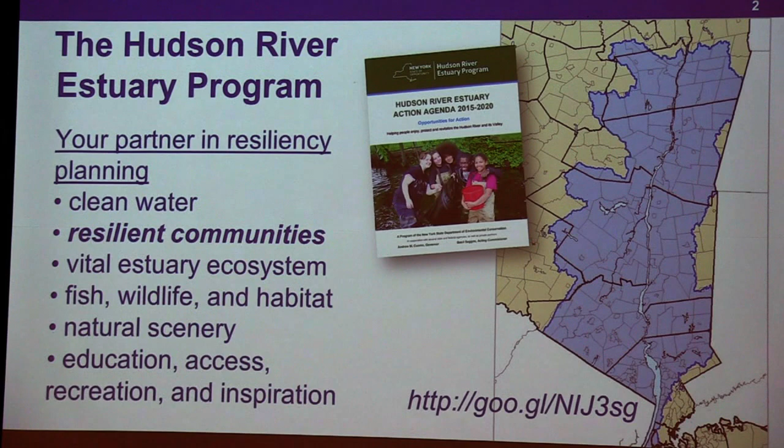I'm just going to briefly introduce our program, the Hudson River Estuary Program. We're part of the Department of Environmental Conservation, but we're a non-regulatory part. We work with decision makers to make decisions that are good for the Hudson River Valley, the ecosystem, and its people, because this is a really unique area. We're less than 15% of the state's landmass, but 85% of its habitat and species diversity occurs here. It's a really rich, complex region, and we want to make sure it stays that way. So we're here to help you with education, technical assistance, grants, things like that. We hope this is maybe only the beginning of our relationship working together.

We work across all these different benefits. This program is through our Resilient Communities team.

Whether you were living here or not, the hurricanes in 2011 and 2012, Irene, Lee, and Sandy, were really the focusing moments for us to get involved in this work of what's the future of our waterfronts. Thinking about longer-term risks of sea level rise, and then these big risks of hurricanes that are hard to predict. But we knew we wanted to do something about it, so we started working with communities on planning for that future and trying to be proactive. Because if you're not proactive and don't create a vision now, you kind of get stuck with what you get stuck with.

The main climate risks in New York State, we do our own modeling, the state funds modeling to understand how our risks are going to change in the future, because we take this really seriously and want to help communities plan. The three main risks are increasing temperatures, changing precipitation patterns, and rising sea level. Those lead to what we call climate risk, the impacts to humans, which are flooding, heat, and drought. Climate adaptive design tries to consider all of these risks, but flooding is definitely the primary one when you're looking at waterfronts.

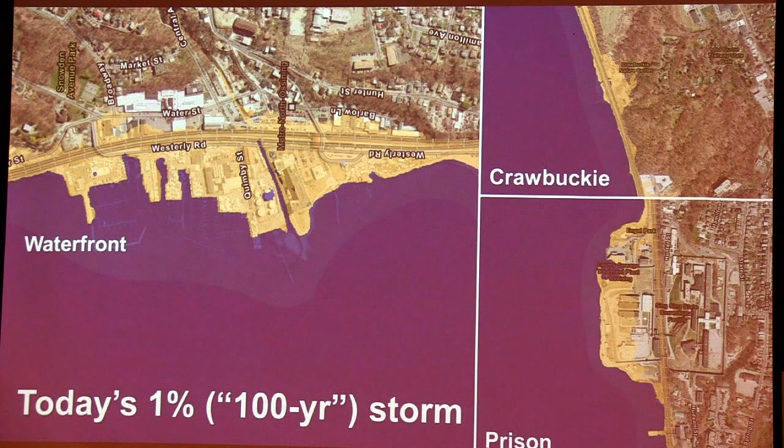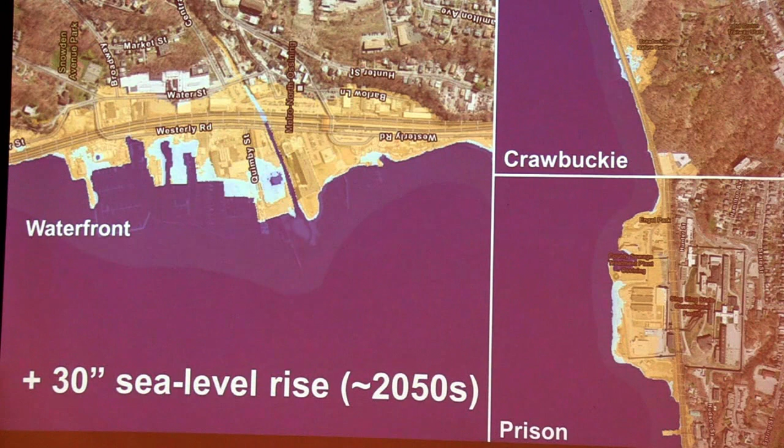If you add in 30 inches of sea level rise, so 30 more inches of water onto the Hudson, that's when you start to see more significant changes. Right now, that's a high scenario for mid-century, the 2050s. So this blue, again, is projected to be inundated all the time, or at least at high tide. This is really the river kind of taking back some of the land.

The good part is that climate adaptation, adapting to climate risks, is to a large extent in your power. Mitigating climate change, trying to reduce emissions and reduce global climate change, is absolutely vital. However, we all share the same atmosphere, so you can feel a little bit helpless when you work just in mitigation. So it's good to couple that with working on adaptation, adapting to the changing risks. And that can be done on a landowner scale - you can adapt your home. It can be done on a business scale - you can adapt your business. Or it can be done on a community scale.

Thinking about where are our buildings, where are our parks, where are our roads, and how are those going to change over time. So that's the really fundamental idea to adaptation: resilience, this concept of being prepared for changes in a changing climate. It's not just about being ready for wetter or drier or colder or warmer, it's about thinking in a resilient way—how can we bounce back quickly after a storm? How can we be more adaptable, more flexible? So designing our systems with more of an adaptive mindset.

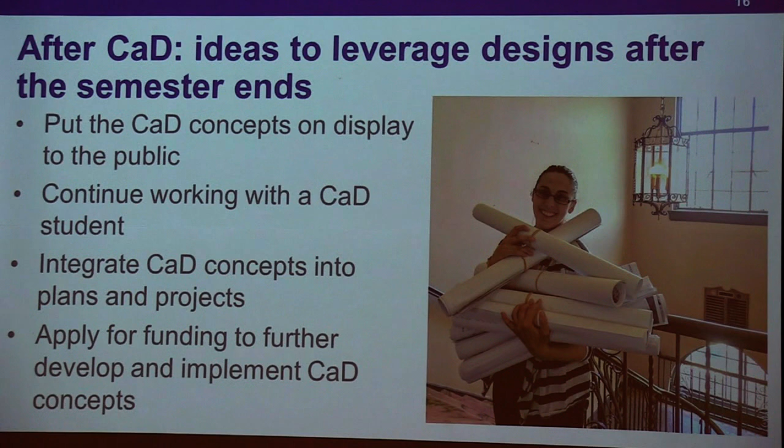Some of the initial ideas are to put these concepts on display to the public. There may be an opportunity to continue working with a CaD student on a special project—we've seen that before. Obviously, integrate the concepts into plans, any and all plans where appropriate, and then apply for further funding. We do a little roundup of all the state funding that could be applied to waterfront resilience, and this year it was over $150 million, so everything from planning to implementation. I have that handout where you enter.

The handout is also available online, and you can see that it's categorized by different types of projects, from planning to emergency management to adapting structures, economic development, etc.

So just in conclusion, I like to look back. Whenever I come to a new community, I like to look back at old photos and old paintings to try to see how much has changed, and it always gives me inspiration for how much is possible in the future. The Hudson River has changed so much in the last few decades, cleaning up pollution and things like that, getting more people out to the river, more access. So imagine what's possible in the next 30 years, because we have better knowledge, better technology.

This is really about talking about that future and what your vision is for that future, and then we can talk about the steps to achieve it.

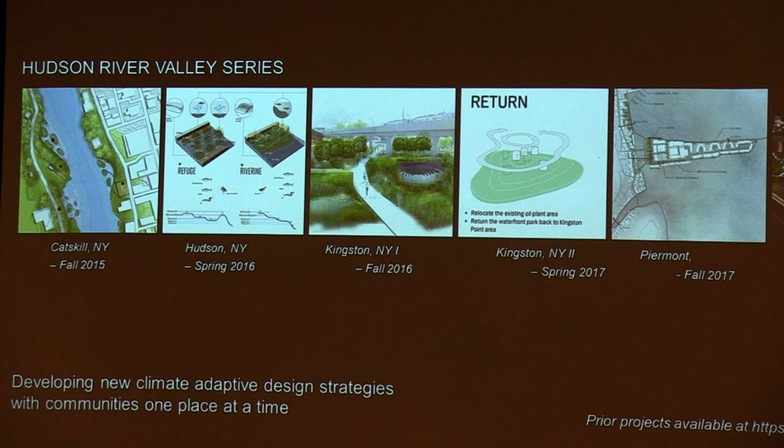It started out a long time ago as just an idea about how we might help people visualize their own futures. There's 2 things we ask at the beginning of this exercise, or this semester, when we meet with folks in the village and the town.

The first one is, what are your concerns about climate change? I think it's really important to get out there and talk about those initially. Equally important is, what is your vision for what your waterfront could become? Because really, at the meeting of those 2 things is where the true potential for this village and town exists.

I often say that a lot of cities want to move towards their waterfront, and a lot of waterfronts are starting to want to move towards the cities and their downtowns with climate change. So that's that space we need to be working in between those 2 things.

Village and Town of Ossining, Fall 2019, here we are.

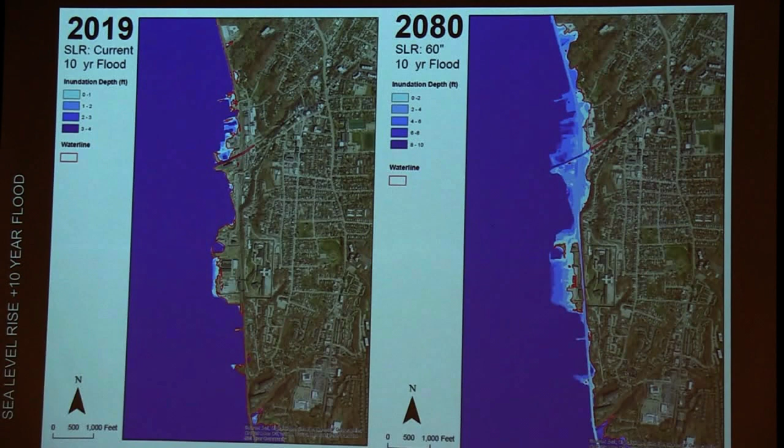That's a relatively frequently experienced flood event. When you get the full impacts of sea level rise, you're going to find that there is permanent inundation, meaning things are underwater almost all the time. And that will become even more extreme when there's a flood event. Flood events are temporary. Inundation is something that has a permanent wetted perimeter. And so that's a concern, and we need to be aware of those two different things.

We took a look at the community to understand what some of the data were telling us. Move through this pretty quickly. Also, we took a look at buildings and land use, some of the existing plans and some of the existing conditions that are present.

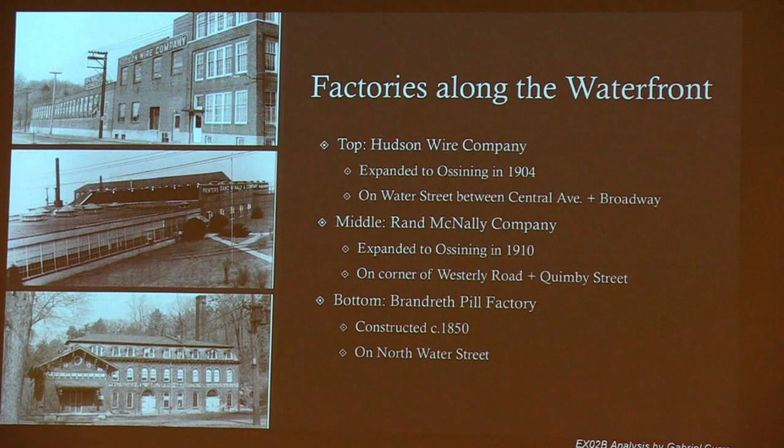Also, we're real interested in the history of the waterfront. What do we know about what has happened here before, and how might that inform some things we do moving into the future?

We took a look at open spaces that are here. There's two fantastic parks down at the waterfront, and then also to understand how water interfaces with those, to understand the impacts on open space as well as some of the built parcels.

I should point out, actually, all of these graphics I'm showing are coming from the students that you'll have an opportunity to talk to today, and so I didn't make any of these. This is the incredible work of these students.

We take a look at ecosystems and impacts on ecosystems of climate change. When water levels rise, so do the suitability of certain habitats for different species and their conditions. And so that's also something that we look at. You'll see some students talking about that.

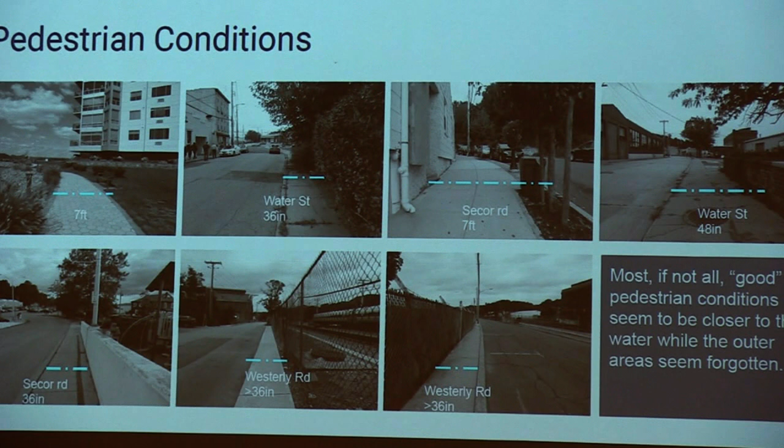We also took a look at the shoreline conditions that are present on the site, so understanding whether there's riprap, whether it's hardscape, whether it's naturalized. These are just a few of the things we looked at. We were really interested in the circulation, how you get down to Ossining, and then also how you walk around, and how some of that is ideal and some of that has opportunities for enhancement or improvement.

I love this quote that someone mentioned: the story of Ossining in many ways is the story of its waterfront. So a lot of it comes together at the waterfront. Ossining is a magnificent place. It also, and it's downtown, and there are some of the neighborhoods that are around, and it also has an intimate link to the waterfront that could be strengthened. So we look at that as well.

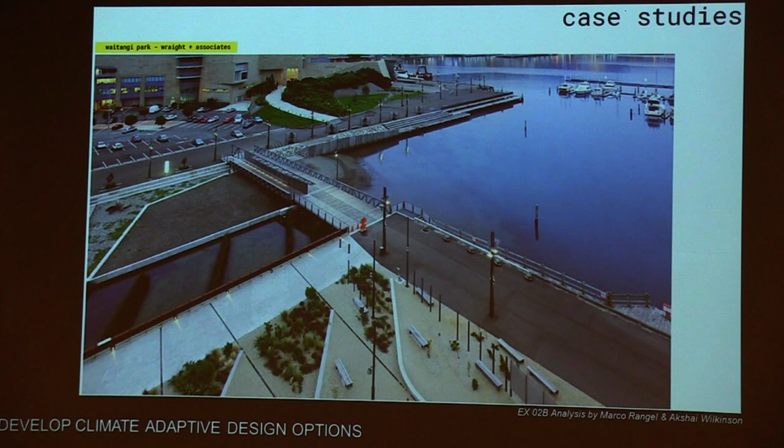From there, we look at different case studies around the world that people have wrestled with some of the same questions. There are very few precedents for cities of your size, and so in many ways, I would consider yourself a leader in understanding not only the risks, but what your vision is and how you might phase that in over time. It's something you might ask the students about as they've developed their concepts - they're thinking about how you might do this in a stepwise basis in a way that could be commensurate with the scale of the municipality that you live in today.

After we understand a lot of those things, we try to develop ideas and go through them over and over. This has been a very iterative studio. I think we've had 6 or 8 different evolving design concept review sessions in this course, so it's really important to get feedback. Today's another day to get feedback from you guys as we look at our work in its final stage for us, but also how it could be a beginning for some of your own efforts. I thought I'd talk a little bit about the open house.

None of this is binding that we're doing. We want to share some important ideas for you. It's not required, and there's no urban policy built around this right now or decisions made around this.

But it is an opportunity for us to share some ideas, looking at what some of that data is saying and things we've been hearing, understanding some of the land uses on the site and the futures we've heard about and that are also possible that we've been thinking about, to really have a discussion and an opportunity for imagining the future of Ossining and its waterfront.

And the nice thing about it is we have as a baseline some of that science where we begin from. So you'll see examples of projects that are both visionary and some that are quite practical, and some in between. You'll see projects where you might say, I love that one, I want to do that whole thing, perhaps, but you may also find aspects of individual projects that you're more attracted to.

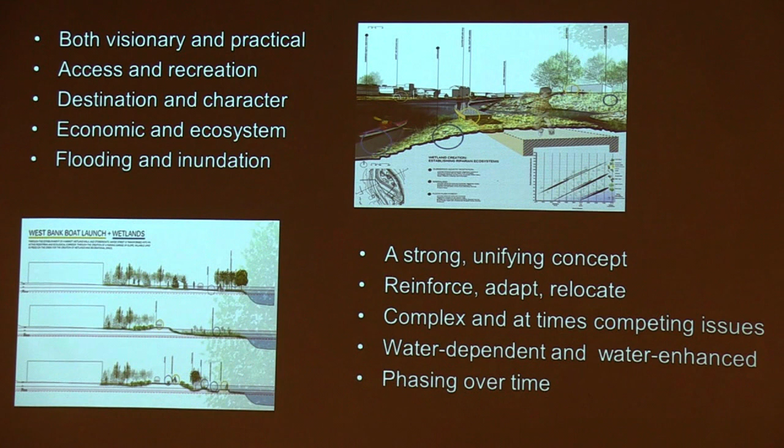Sometimes these are actually very complex questions, and so there's a lot of goals along the waterfront. Sometimes these things can be complementary and sometimes they can be competing. So you'll see students working with all of those and making choices based on their best design observation as well as some of the feedback that we've received.

We're always thinking about uses on the waterfront that are enhanced by water, and we're always thinking of uses along the waterfront that really need to have water. So those are things that folks have spent a lot of time working on, emphasizing.

So in the open house, you can expect to do a number of different things. One being that I think this is the kind of thing we can all do today, whether we're students or others here as community members, including myself: listening to different ideas, asking questions about those ideas and concepts, as well as sharing what's important to you.

And maybe perhaps as someone who's a member of this community, local knowledge that you may be able to bring to bear. And then finally, discussing some of the futures that you envision for your waterfront. I think that's something we'd like to do today.

A very important outcome we seek in this process is the ability to start and continue dialogues that maybe began in September when we started, continued on through this semester, and we hope carry on well beyond. So we look forward to talking more with you today. I think that's all I have.

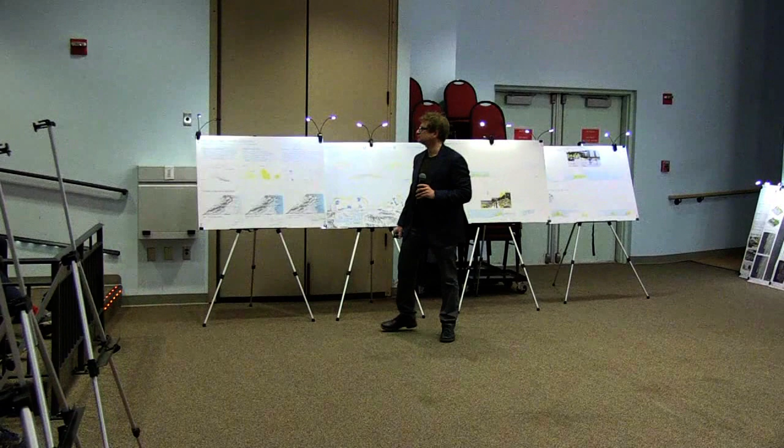We have 9 designs that we can share today. 4 of them are in that front entrance area where you came in. There's one in transition in the hallway that you may have seen. And we'll have 4 or 5 sets of boards in here. Please make your way to circulate around. We also have refreshments in the hallway, things to drink and eat, but we can't bring them in here. So there will be plenty to see in here.

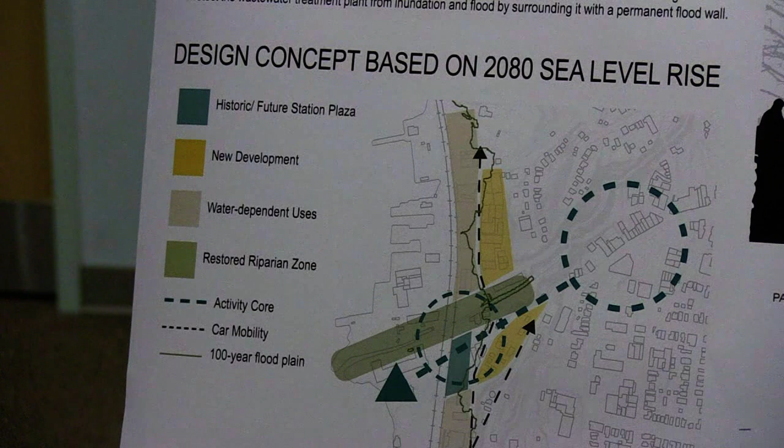To start with, this is my concept diagram looking at the overarching way of spatializing the new development. This green represents the Sing Sing Creek ecological corridor. This orange represents areas outside the 2080 100-year flood, so are the best places for new development. This tan color represents areas that might be best suited for waterfront, water-dependent uses in the future. This teal area represents the Depot Plaza, currently the parking lot for the train station. Historically it was actually called Station Plaza, and was a much more picturesque place than it is now.

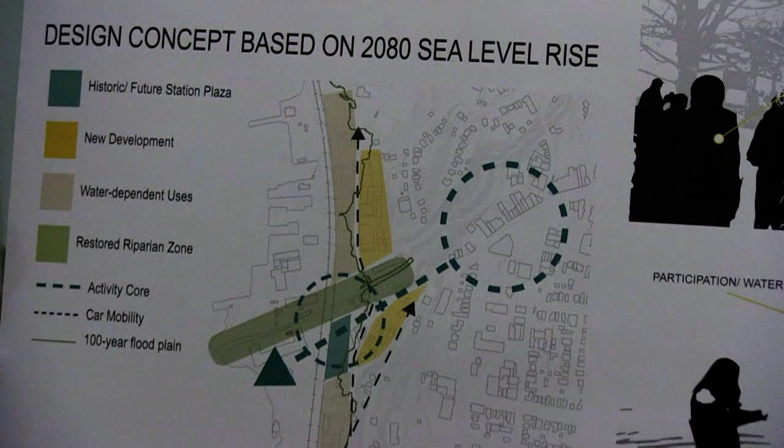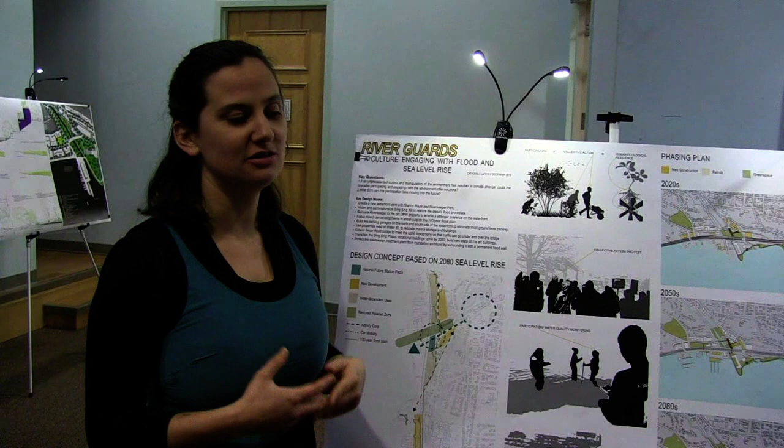These green circles represent the importance of linking the waterfront with downtown. So I'm basically proposing a move of linking downtown with the waterfront through the creation of something called a Station Plaza. As you can see in these drawings, the Station Plaza is this little brown area that could be an aspect of the waterfront developed right away, even in the 2020s becoming a reality. It would be a new downtown core that the activity of the waterfront could radiate out of, a place not currently very susceptible to flood, where people could enjoy themselves as pedestrians. So it's a pedestrian-only corridor.

As I mentioned earlier, I'm thinking about different ways that people can participate and engage in collective action, so as to be responsive and flexible to whatever changes are coming, because really we don't know, and we can't make strict plans. We need to be responsive as communities. Some ways that could happen are protests or meetings at the waterfront, or continuing the water quality monitoring that Riverkeeper already does, maybe taking that to a whole new level related to sea level rise, and also recreation.

Moving through the phasing plan, the creation of Station Plaza is the first thing that could occur. This orange color represents new construction, so I'm proposing a new parking lot and some possibly mixed-use development in other high areas on high ground. By the 2020s, there's going to need to be retrofitting, shown in tan, to a lot of buildings currently right on the waterfront. Moving into the 2050s, we're seeing the construction of a few more new buildings.

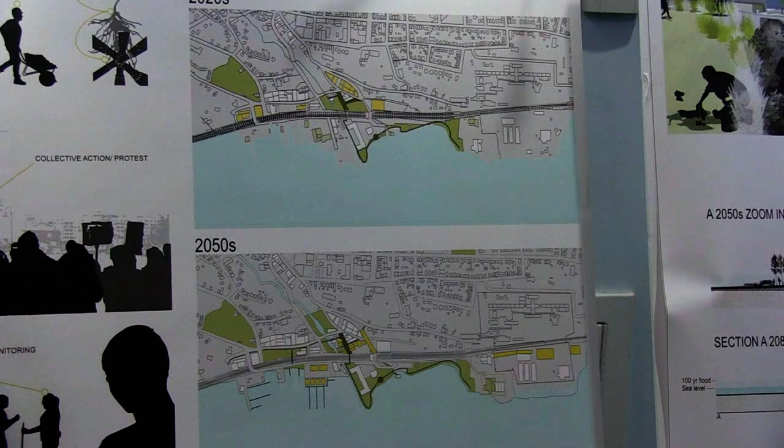The marinas might become more floatable buildings, and I'm proposing that the area currently west of Water Street become an area the marina buildings could move into as time goes by. Also, parking garages are a way to really utilize space better. This brown color represents a pedestrian path, because I think it's really important, since the waterfront doesn't have a good pedestrian loop right now. So that could be integrated.

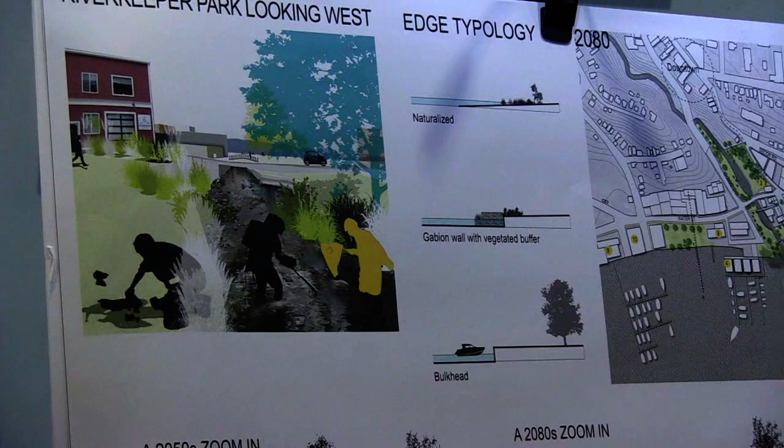Moving to this next poster, I'm trying to explore these ideas a little more. Looking at these diagrams, I'm showing three potential edge conditions. One would be a naturalized edge condition, like on a beach, for other areas of the waterfront. But I think a gabion wall with some vegetation could be a good choice for a lot of other areas, where you still want to hold the edge of the water in place, but the vegetation could help that area be more responsive to flooding and protect it from storm surge. Then bulkheads in areas where access is really important, like with the marinas.

This is a section taking place in the 2080s, and this is the section line. It's an area where currently there is a marina, but in this section I'm proposing this center area could become more of a public space while the marinas are on either side, with a dock that would enable more public access. This shows what that transition might look like - in the 2050s, when the rail is still on site, people are participating in the environment and working to build this new park or planting vegetation.

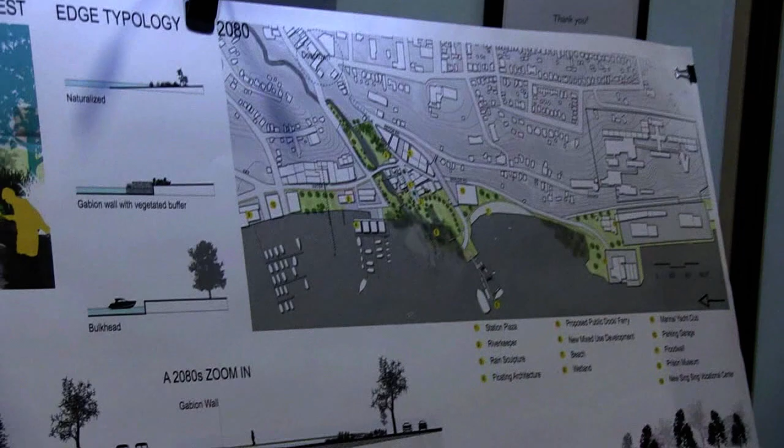This second section, Section B, takes place here, going through this new station plaza. The station plaza would include using some of the existing buildings on the waterfront and adding some new ones. This section represents 2050. Here we see the Harbor Square Apartments, a pedestrian bridge over the railroad, and this is Station Plaza. As you can see, it's been flattened and elevated a little bit, because right now the street goes downhill towards the waterfront, and I'm proposing it could be a leveled area.

But then by 2080, we're seeing a swale and gabion walls. The idea would be to encourage the development of wetlands, because we've read a lot about how wetland habitat is really important, both for protecting people from the water, but also for animals and fish.

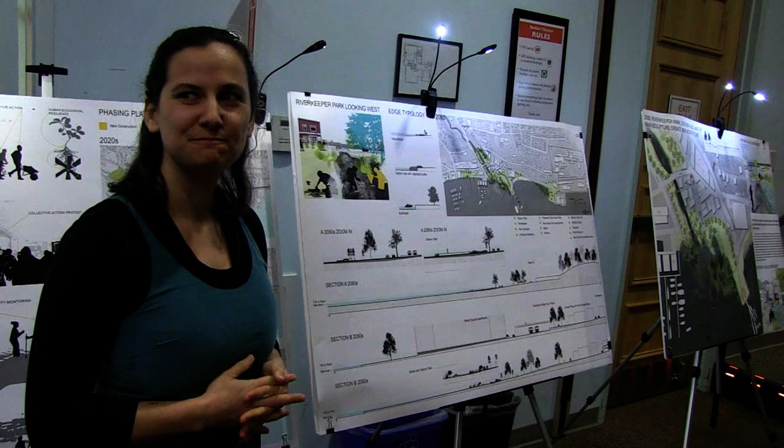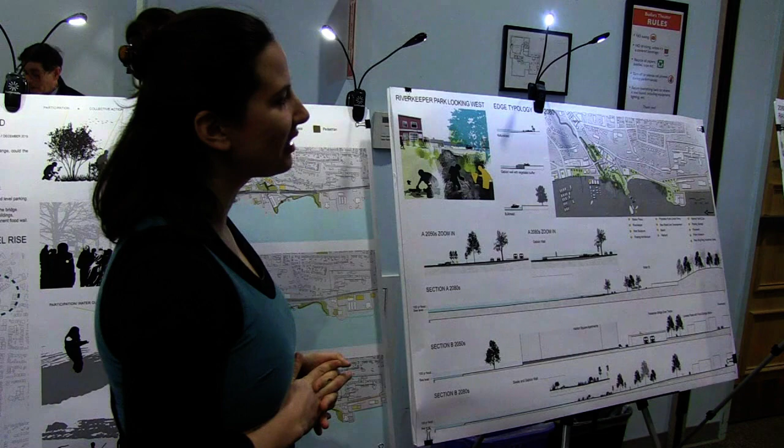You might notice that in this section and in this plan, there is not a railroad. My rationale is that although I think transit-oriented development is extremely important, doing it in a floodplain is not really ideal, especially with this pressure of water. So instead of trying to build an entire monstrous rail line all the way from here to New York City, I think the rail, if we're going to do that much construction, should maybe just move to higher ground, possibly Route 9A, and instead we could allow the Ossining waterfront to be a place for people to experience the water. Also, by 2080, New York City is going to be under quite a lot of pressure as far as the water, which is difficult to think about, but that was the rationale in my design.

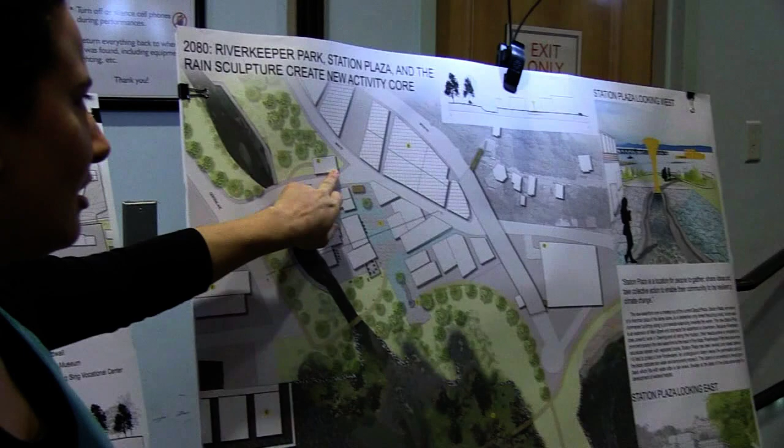Moving to the last board, this is a zoom in of the Station Plaza area. I'm envisioning this as a place where people can really gather, share ideas, and be a community. I think that feels important to Ossining because I already get the sense that there's a strong community here. I've proposed moving Riverkeeper to the head of the plaza, adjacent to Sing Sing Kill.

The kill is expanded and naturalized in some areas. These striped buildings are zoned just commercially, while these others are zoned mixed use where there could be some housing. But these buildings would be very small and on the human scale, providing a unique, walkable experience with coffee shops or restaurants. This could be built right away since it's currently a parking lot that could be used differently, and could really be an attraction for people coming to Ossining.

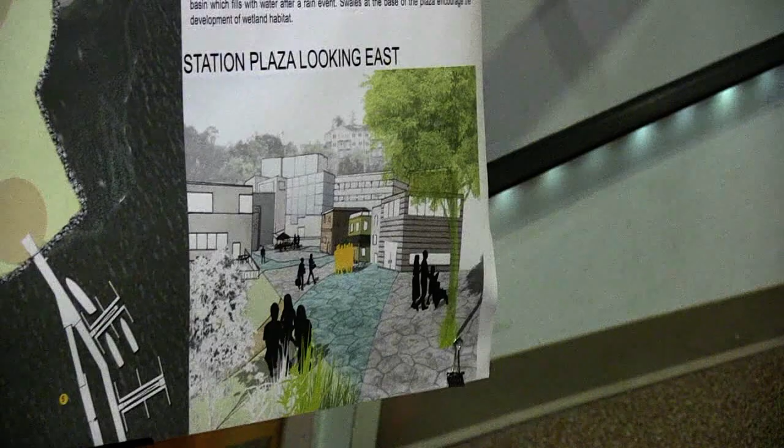I've tried to depict this walkable environment in these edge drawings, and I'm also proposing a rain sculpture that could reflect changing water levels and flood levels, to bring more awareness about flood and rainfall. I've added the Riverkeeper patrol boat in the background to bring out the idea of participation and a sense of ownership through action—that if we're actively engaged in our environment, we know what changes are coming, which might enable a better response.

This is a section of the Station Plaza area showing it as a kind of green infrastructure that would have some flood storage. It's also shown here—this is an area for the flood to be stored when it does flood.

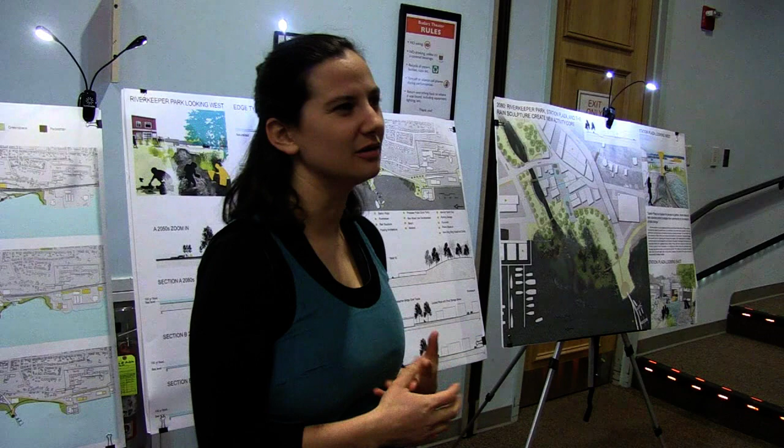Obviously the data we have isn't 100%—we don't know exactly what's going to happen—but based on what was available, there's a lot of inundation surrounding the apartments. So even if the apartments themselves might not be underwater, the area all around them could be by 2080. Because of their location, they'd be susceptible to a lot of flooding over the years, so maybe in 60 years there'd be enough damage that it wouldn't make sense to keep that there any longer.

It could also enable space in other places to be more public if that landmass wasn't there—the water could go there instead, leaving less water in other places.

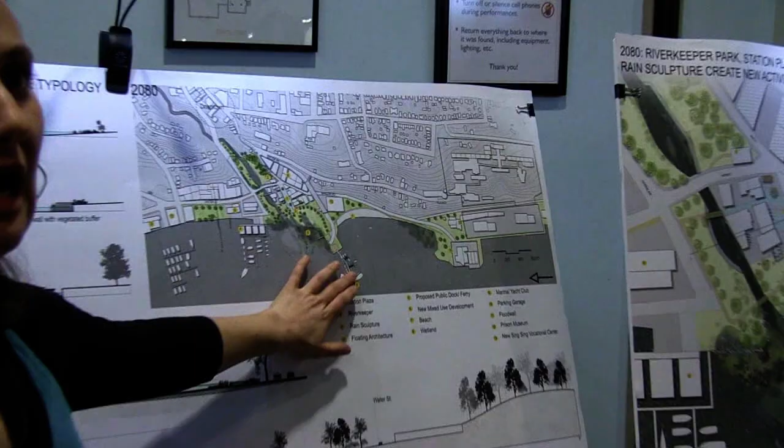So in the 2080 plan, where you're proposing development take place, what does climate adaptive development look like structurally, so it can last another 100 years? It sounds like the plan is to evolve the waterfront so that whatever gets developed there, subsequent to this phasing plan, could remain a lot longer.

Well, for example, these buildings are all floatable buildings, based on ideas from the Netherlands and other areas in Northern Europe where they build floatable buildings. That's for the marina—I'm asking more about these other ones.

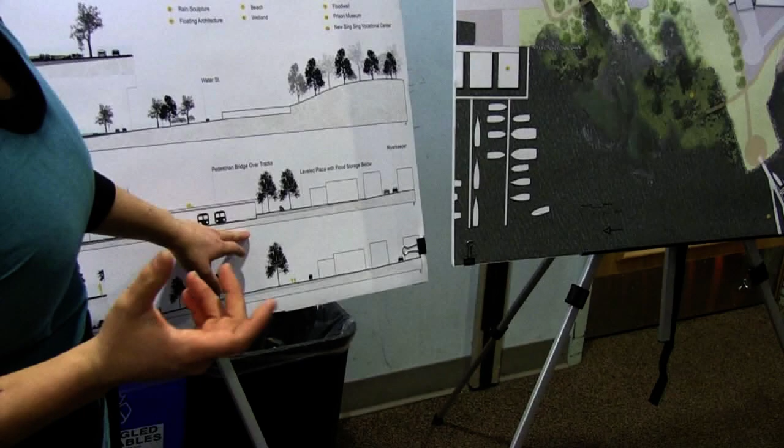This area over here is safe from the 100-year floodplain, so these buildings would be normal. For these other buildings, the intervention I've proposed is leveling the plaza so it's raised between 1 and 6 feet, so it might get a little flooding in the 100-year flood, but only about a foot of water. Those buildings would need to be flood-proofed on the first floor, but I imagine them being more modern buildings built to tolerate a bit of flooding, used for commercial purposes, not for living. Then the rail is here before it goes away completely.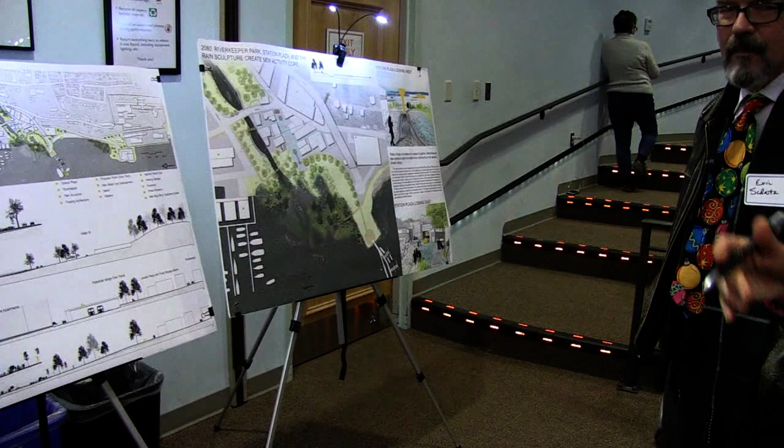Of course, the pieces that are hard to imagine are large projects like—I can't even remember the name of it—Harbor View, Harbor Square. I was going to say Harbor Square, and then I was like, no, that's not it. Harbor Square going away and having to relocate many residents, and the train not being there. Those are hard for us to wrap our heads around. Not that we don't have to, but I think it's difficult. Yeah, I completely understand that.

So, first off, I was really inspired by the idea of trying to establish a sense of timelessness, because when we're dealing with these highly speculative futures, we know, as we've studied history before, things change quite drastically sometimes, not only in our culture, but our physical choice of aesthetic. So some of the things I started to establish as a design palette had more to do with these timeless qualities, things like the rocky shoreline, the woodland that would have been found along the Hudson for hundreds of years.

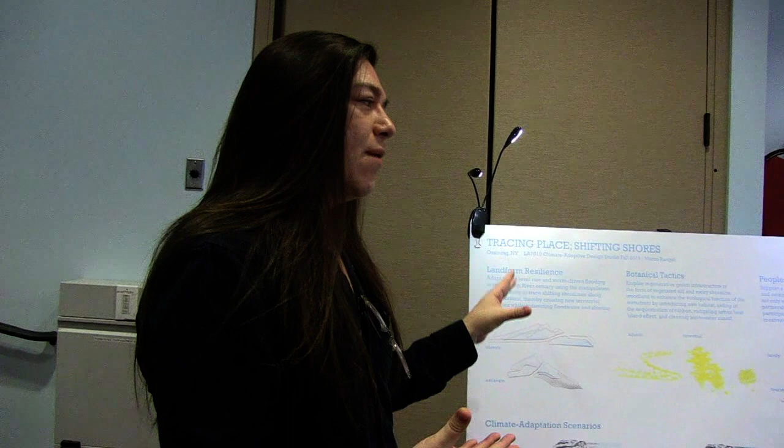Topography, of course—there's so much interesting topography in this zone, so that was going to be really important: the idea of elevating and excavating in key areas to give that variety to an otherwise very flat area along the waterfront. And then thinking, of course, about people and advocacy, because we have design scenarios in many different places, and it's not often that we get as much interaction with the communities we're designing for as we have for Ossining. So in this particular case, after some of the conversations we had in September and October, I started to identify...

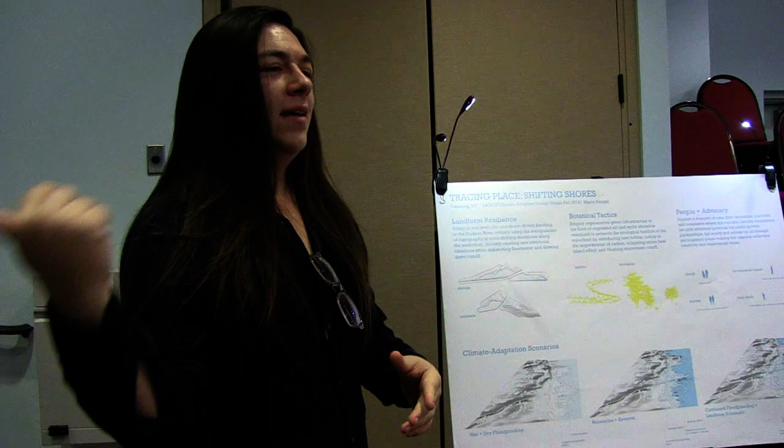A few demographics—of course not everybody, but a few that could help me think about these different nodes, hopefully through the lens of how they might experience them. That's everyone from incarcerated citizens in Sing Sing Correctional Facility, to your average family, young family, established family, tourists, visitors. Having lived in New York City before, I know people commute up to see things like Dia Beacon, Storm King Art Center, and I can really see this waterfront, especially with the incorporation of the big museum development, becoming a destination as well.

And I've kind of highlighted in the darker blue some of the actual structures that I think can be economic drivers.

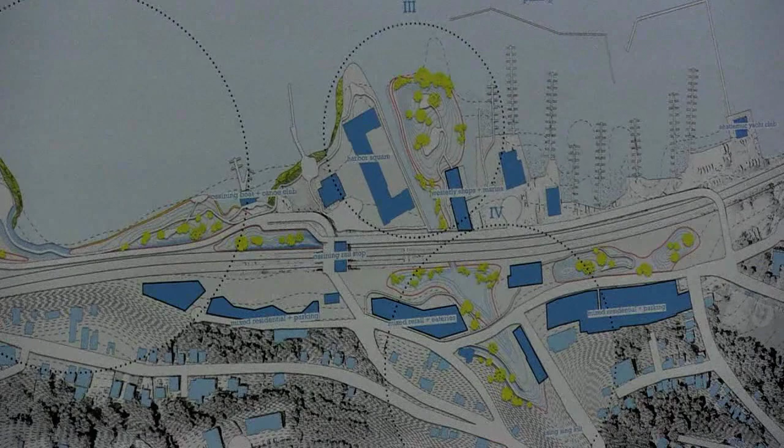So you have everything from residential, like Harbor Square, that's already beginning to do that, and then really looking at Water Street as a really nice new way to bring in mixed retail and residential, thinking about taking away some of the large parking spaces and tucking them into some of those vertical buildings that would be built along Water Street, which affords us the chance to build up some of this topography and get more of that naturalistic scene along the actual waterfront.

So what I've essentially done was identify these 4 zones that I think not only sew the waterfront together in unison, but create these very diverse ambiances and feels.

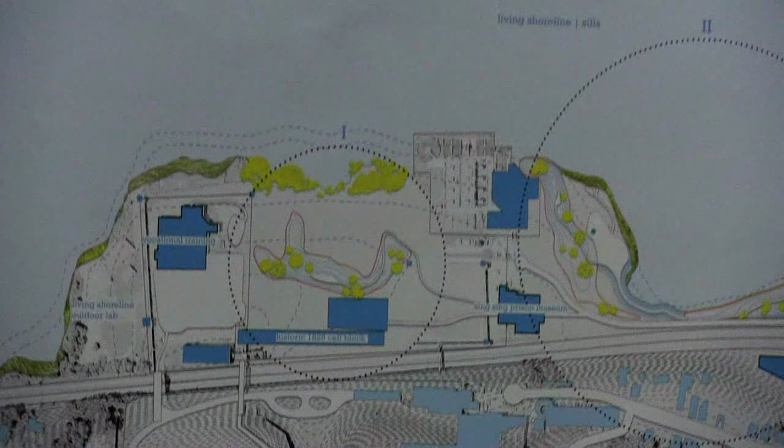So for the Sing Sing Prison Museum zone, which I'm still in my scheme imagining the correctional facility still having some sense of occupation, what would start as this sort of rehabilitation and re-entry program for citizens, getting them to not necessarily be welding things like license plates, but actually working on plant nurseries that can produce a type of material that can be outsourced to the rest of the waterfront, which not only gives them a sense of agency and value for when they re-enter society, but it's giving back to the community that they're currently even being held within.

So it'd start off as that, and then in the next coming decades, as they establish these living shorelines, these beautiful ecologies, it would almost become like an outdoor exhibit for the prison museum. So you have the beautiful artifact of the 1825 cell block, but now you have more of this almost landscape exhibit in the form of the living shoreline. And that's what I'm calling the Reverie.

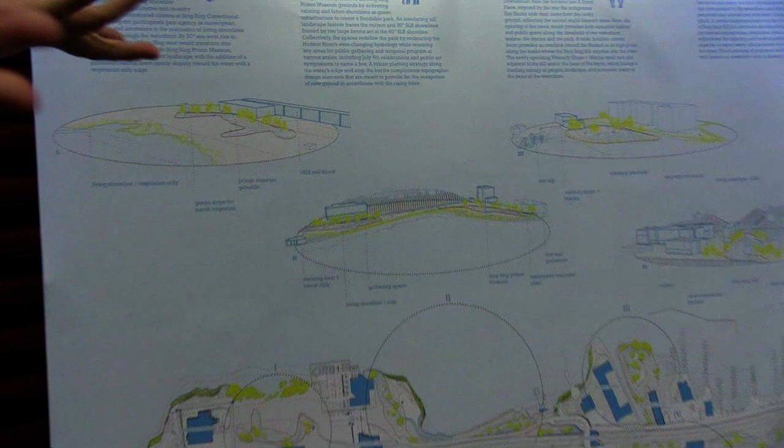And as you move into the central part of the waterfront, you have the harbor, of course, and that's, I think, one of the biggest nuclei right now, with the playground, the big gathering spaces that they have for 4th of July. In this particular scheme, I'm imagining raising the land and kind of framing it to protect, slow down some of that wave action, slow down the water, and allow for plants and people to occupy, even when the water's rising, some of these high points.

So over time, they almost become like these little riverine islands that eventually you'd kind of have to connect with maybe some elevated paths. But as far as the activity there, a lot of that I think would retain its character. I think it's super valuable to have that large gathering space. The real difference here is that you'd be manipulating the landform itself and adding a different vegetative design strategy, essentially.

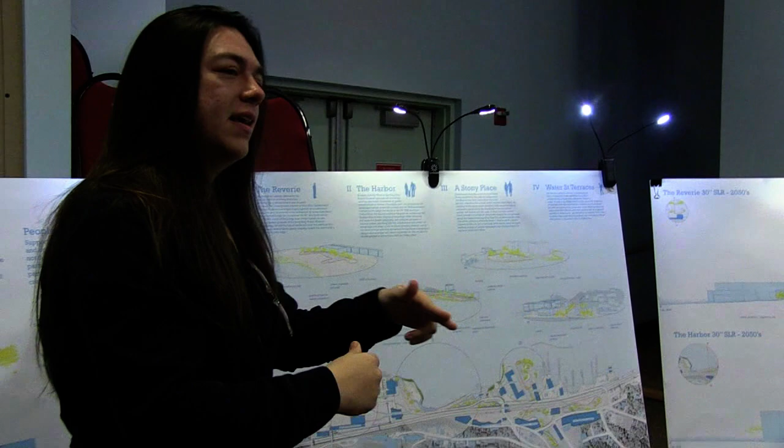And then you kind of move over to Sing Sing Kill, right? And the 2 zones that I have there, one I'm calling Stony Place, after the famous Sing Sing origin in its name. And for there, I think what's really important to consider about the Kill is that even though you have the Hudson, which is this massive, super majestic waterway, there is also a very much more discreet waterway when it wants to be, kind of entering the Hudson right along our waterfront.

In this particular case, we found that the Kill is highly channelized, extremely narrow, and has had historic flooding. So in my scenario with Stony Place and Water Street terraces, it's really all about widening some of that shoreline along the Kill to create this scenario where on any normal day, the creek would be trickling through and you'd have a lot of dry terraces where people could go down into the area and gather. But then in moments where you do have a lot of that runoff coming down from uphill, all of a sudden that water has somewhere to gather and slowly make its way down into the Hudson, as opposed to rush and gush and inundate everything.

And as far as the Stony Place goes, really I'm imagining this just really gorgeous rocky berm, inspired by the picturesque, the history of romanticism on the Hudson River. Really thinking of what could be a sense of timelessness in the palette, as I was mentioning.

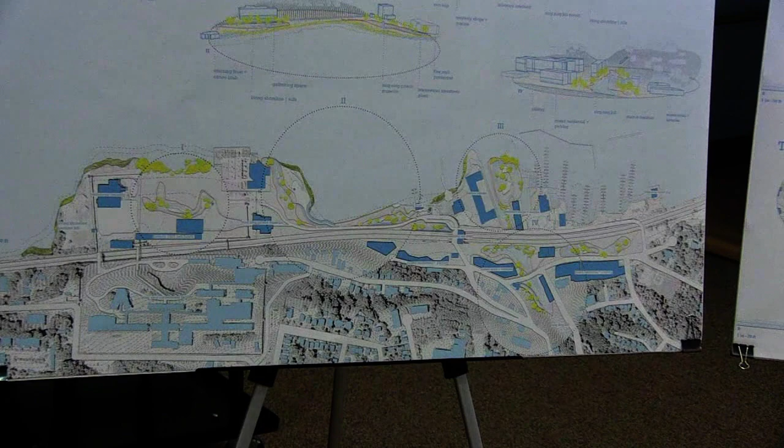And in particular, looking at the darker blue as some of those economic drivers for residential opportunity, mixed retail, different kinds of commercial uses that not only serve the local citizens, but attract some of those out-of-towners like the New Yorkers who aren't too far, who might find themselves wanting to make a day's trip out of coming to Ossining. So I wanted to think about that sense of visitation from the outsider's point of view as well. As far as the drawings over here, they're really just looking at the sectional quality in which the design lays within the larger topography.

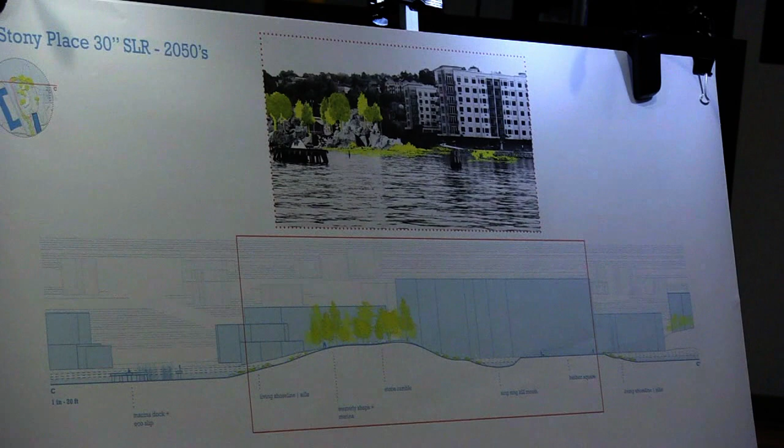I've put together a few collages giving you a sense of what some of that materiality could look like. I wanted to think about the boater's perspective too, since we're not only experiencing the waterfront standing along it, but potentially being out away from it. Imagining what that scene might look like for someone just boating right by, not stopping at all, but then wondering if they should come back on their way down and anchor or dock somewhere to spend a few hours or half a day.

And that's essentially the gist. If you have any questions, I'd be happy to answer. If anybody else has any questions, comments, or thoughts.

What do you envision happening to the railroad? So with the rail, I very purposefully wanted to think about projecting this scheme at an in-between point between now and the most extreme scenario. I chose the 30-inch sea level rise, 2050s, just a few decades away. I've kept the rail in this particular scheme, assuming that with some of these more cultural and physical changes, the proper policy and entities would start to accommodate accordingly.

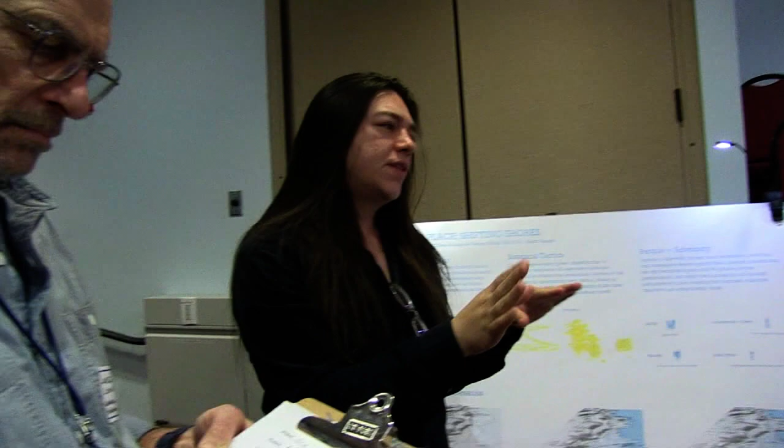According to the projection for this time period, the rail itself isn't inundated unless it's a storm event, which are more temporal. So keeping it, most of the tactics here are a little bit more within a realm of pragmatism and modesty, I guess one could say, within what might be possible. But yeah, essentially the rail stays, and much of the character and programmatic usage of these spaces remains as well.

It's really taking some of these timeless elements in the design palette, like manipulation of topography, different kinds of planting strategies, to not only accommodate those shifting shores but inspire cultural shift as well with some of the territorial use.

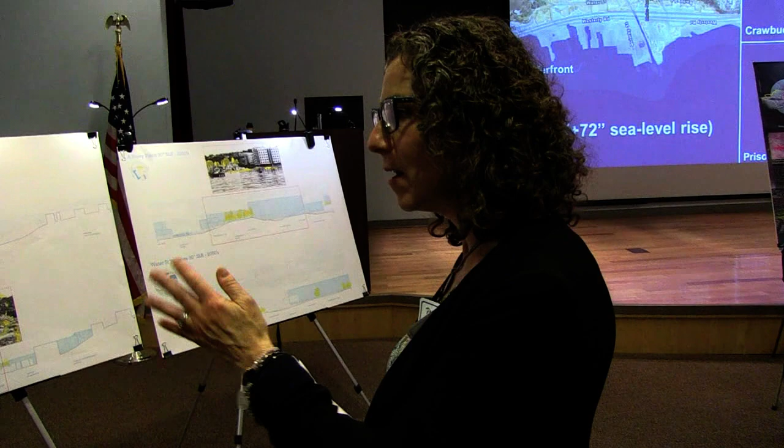So is there still — first of all, I just want to say I think you did a great job laying out for us the transition and all of these separate sections. It makes it very easy for the layperson to understand your thought process, your vision, and also what it looks like. I do have a question about the use in section number 2, just because that happens to be a particular area of my focus.

A lot of our high school students have been very interested in reopening the beach. I'm not sure if beach use, with all the rocks, is still something you're envisioning as part of this or not. Is that still access for swimming?

So when you look at the harbor, you sort of see these two zones that I've outlined in red. Those are the zones where you would actually build up the topography, using a bit of that rocky materiality. But in between those, you have low-lying areas, and I very purposefully retained that nice little cove that's occurring there with the beach.

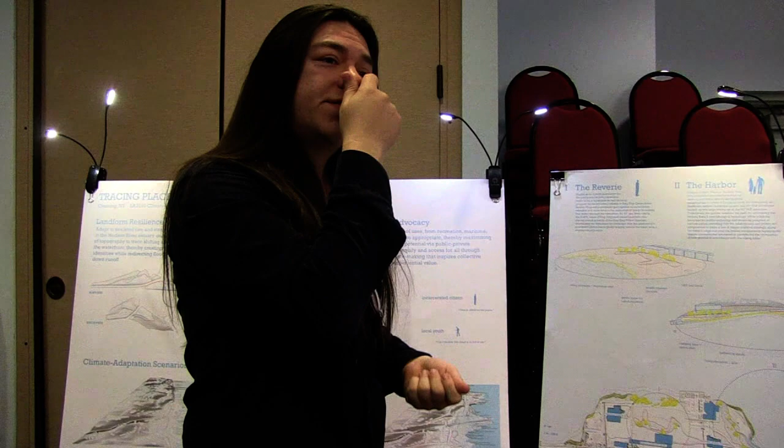As far as the materiality of the beach, I think as we see water coming in, really rethinking how you pave or set some sort of foundation for that is going to be integral. In particular, one of my responses to the expressed desire from the youth to find a place of respite was to also consider what other areas, even outside the Hudson itself, could offer for them.

In this case, an area even tucked away from the more family-dominated environment, where I can imagine these adolescents wanting to gather around a coffee shop along Water Street and still find an outdoor space that provides the same sort of thrill, calm, and beauty that areas along the harbor and the main park today offer, but giving them a bit of that variety as well.

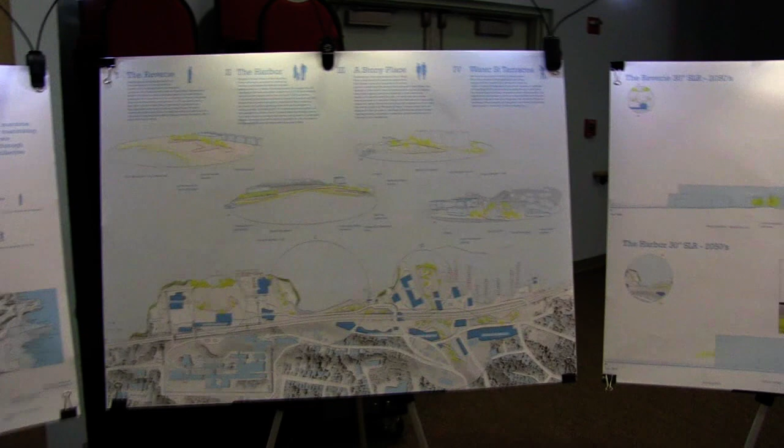And in terms of what you talked about with what's happening inside the prison to help out with landscape materials, and trying to think about how that would help along the entire Hudson — that's really interesting.

The other thing that I thought was great, and I just wanted to know about, was the outdoor performance space — if you had any thoughts about that and where that would end up being, if at all, or does that go away? And if you could talk a little bit about Ossining too.

Well, so much of the current usage of the harbor, I'm imagining taking place just the same. As far as small concert gatherings and such, I think you would want to work with that new topography.

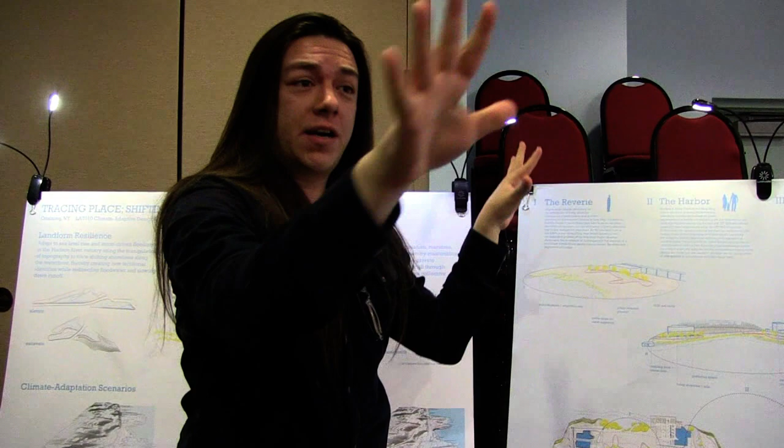One of the benefits of having some of those slopes is that once we get back to the drawing board and flesh some of these details out more, you can imagine how nice it might be to have a natural amphitheater, just having that slope in and of itself. That's kind of what I'm imagining for the harbor berms.

But then you have a stony place, which currently is filled with these giant oil containers. I think that potentially could become a really nice gathering spot, as well as the threshold between the current park and the marina and the boating community zone. That's meant to incentivize the bridging of these two uses that are currently going on.

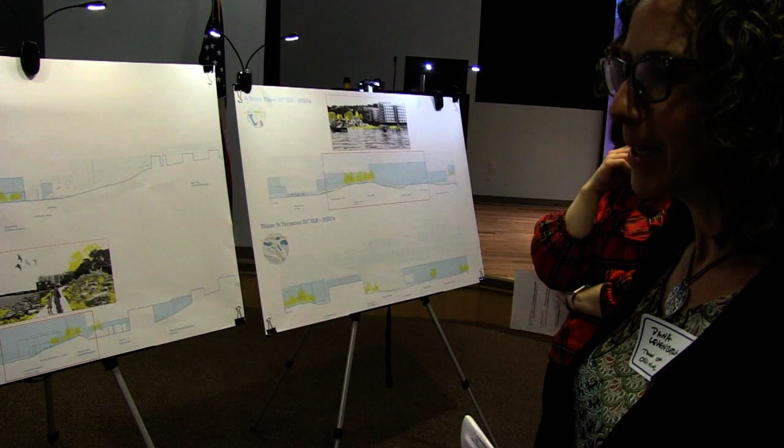It seems like you really gave a lot of thought to this. You took into account a lot of the historic aspects of our community and tried to incorporate those into your design as an evolution instead of a revolution, which I think is helpful. We're all very curious about what's going to happen with Metro North and how that's going to impact all of this in the long run. But I think this is thoughtful enough that it could evolve with or without the train being there.

That is what I was going for.

Right, absolutely. And when you talk about that amphitheater, I think a little bit about Providence, Rhode Island, along the river which they daylighted, and they have all these performances now out there. That's what I'm imagining with the Water Street terraces as well.

So you can kind of have that terracing amphitheater quality, not only in the harbor but even in those areas where if we're widening the area along the Kill, more often than not it's not going to be filled with water. Only during those events after heavy precipitation does it act almost like a retention basin that slows the water down. But in those longer periods of dryness, that's where people can start to gather and have cultural events. So you have this duality between the landscape and hydrologic performance and the more human cultural performance as well. Anybody else?

So another thing that I was... check it out. Great. Yeah, I did a similar style project when I was in school, working with a local municipality, up in Vermont, University of Vermont.

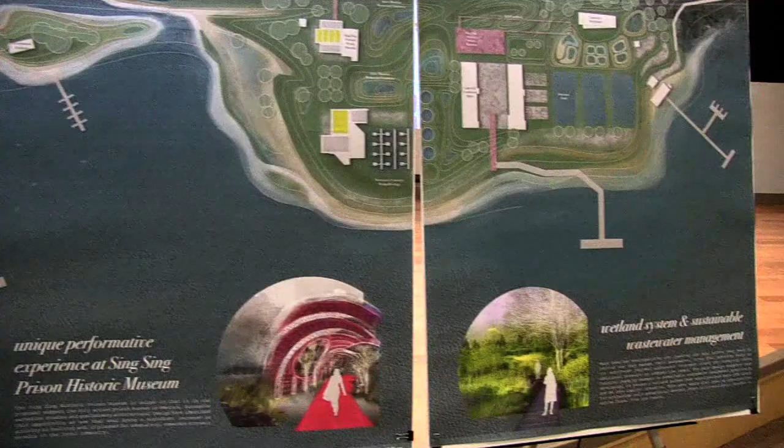Cut and fill operations, so that Water Street now becomes the new waterfront. Whatever is on the water side of Water Street becomes a floodable landscape that's fully accessible to the public, and then behind it is where we start investing really heavily.

Cut and fill operations are going to be hyper expensive, so I'm suggesting there's a massive influx of infrastructure, starting with the museum, the prison museum that comes online in the short term. It also starts coming into this nature culture district through a series of investments that move from an art museum, performance arts, amphitheater available for the population, and other water-dependent infrastructure, heavily invested over here.

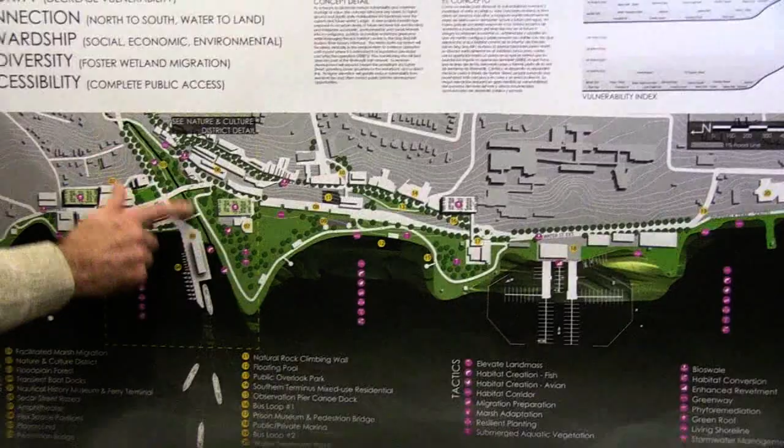Invested also into the environmental and ecological—what the Sing Sing Kill brings to the table, because to me that's hyper important, along with the wetlands that are going to come online in the 2080s. This is going to be a really ecologically rich area. It already is, but I want to leverage that even more so we can start bringing more people to the community and develop a waterfront that is resilient.

As far as infrastructure goes, Water Street will be developed really heavily, and that becomes the new waterfront that is invulnerable—it's never going to get hit by water. You can bring it all the way down to the museum and keep on going. So there's a big loop that goes all the way up to 9A.

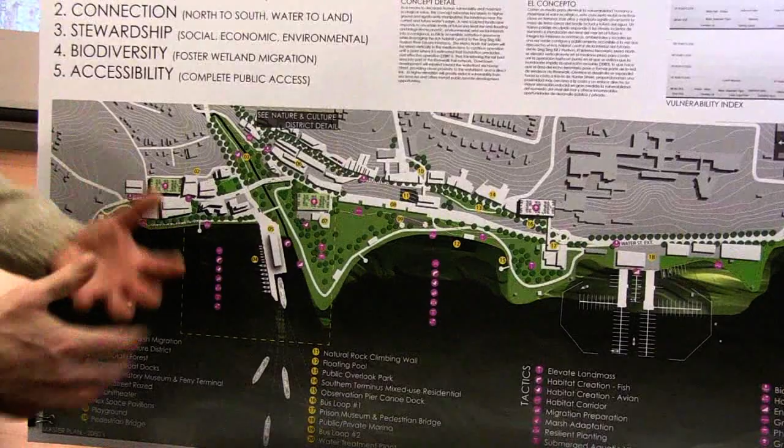That could be a bus loop or a trolley line, something that brings the population down from the uplands near 9A all the way down to the waterfront, and you don't need a car to do that. If you can do it with a bus, you can bring a population that maybe doesn't need a car, can't afford a car, or doesn't want a car, and bring them down to the waterfront that again is available for the entire population. It's floodable, but all the infrastructure is behind that line of defense in the sand, behind that Water Street line.

What do you mean by cut and fill? Yeah, what's the term you're using? Cut and fill costs a lot of money, so my suggestion is this.

If something is going to become flooded in the future, step forward before that happens. In the Sing Sing Prison West area, we know a lot of this landmass is going to be underwater. So in the short term, take some of that landmass and put it somewhere else that's going to be flooded in the future so it doesn't flood. For example, if you start building up this area where the current beach is, making it so that up until the 2080s you can still move through that space.

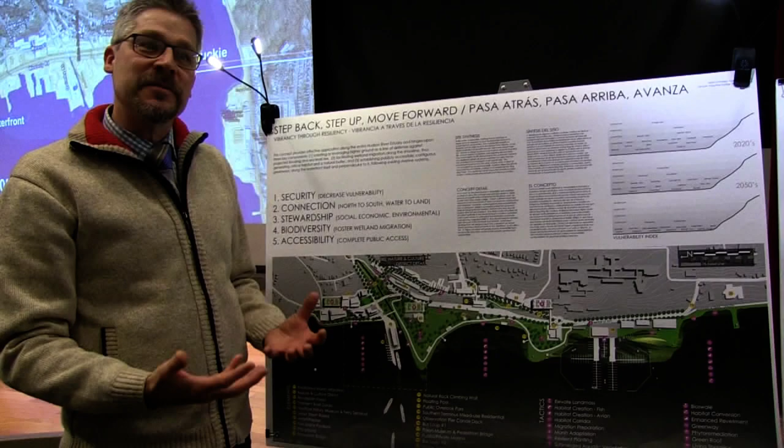Then the cut is happening here, the fill is happening here, and in other strategic locations I've got listed on that second board. You can see where assets start coming offline, they get moved to somewhere else that's not as vulnerable, and that creates an opportunity for something else to take its place. In my mind, that something else is a waterfront that's available and accessible to the public.

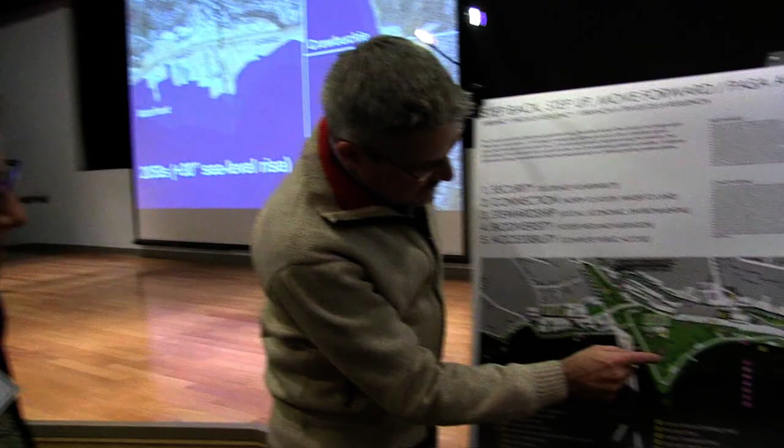So I missed the part - is all of that green water dependent or non-water? All the green, essentially, any green below this red line is going to be a floodable landscape. So anything you see in green is a public park area that's floodable, especially in this area where the Sing Sing Kill is.

And the white, what looks like a path - is that a raised walkway? What is that? Anything in white is infrastructure. These buildings designate different assets that come online, like an amphitheater, or an arts and culture museum, or a performing arts center, or infrastructure in the form of roads that create bus lines or thoroughfares for people or vehicles.

Great, so this was what I meant - is this thoroughfare pedestrian? That is pedestrian, it's the Riverwalk. Got it - it's the Riverwalk that now comes online, connects Yonkers to Ossining, and then points forward.

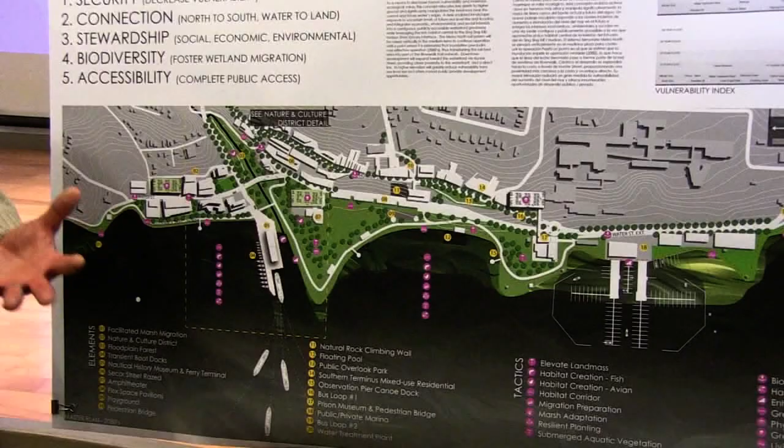But it's a pedestrian path - it's not raised? No, it's not raised. Oh, it's not raised. It's raised to some degree when I put fill in, but it's floodable. I see, so you might not be able to use it in a flood, but you can use it otherwise, all the other times that it's not flooded. Okay, floodable, gotcha.

What kind of materials do you use, or would you use for something like that which is floodable, that would sustain flooding and still be in pretty good shape after the flood? I think that starts with the edge condition. In my mind, the waterfront gets tapered at a very low grade all the way to the water, so that when the water rises it can become wetlands, and that wetlands can act as a buffer for the water coming in.

But it also means that in certain places with more of a hard edge, it's made with riprap, a combination of rocks that essentially protect the landmass above it. Then you bring in soil that's remediated, able to grow vegetative mass. If you put vegetation on that soil and the roots penetrate, you could possibly remediate some of the soil on this toxic site, and also start building the soil up with a root system that can adapt and take the force of nature.

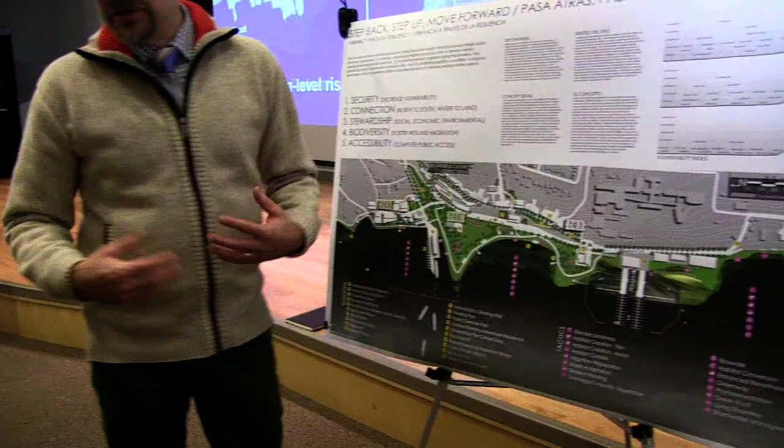Is Harper Square still in this picture? Not in the 2080s - this is 2080. So in the 2080s, Harper Square is going to be underwater. I'm suggesting that Harper Square moves up to Hunter Street, and that leaves the landmass for another purpose - in my eyes, that other purpose is a public amenity, a publicly accessible waterfront.

And that's the same with the oil tanks - this is where the oil tanks are right here. The oil tanks come offline really quickly, they're going to be underwater in the 2020s. I want to get them out of the way, get that soil and landmass remediated to whatever degree we can, and then that converts essentially over to wetlands once I fill that area in.

I missed the beginning of the presentation, but I'll go off what somebody else told me - he said he was really impressed that you incorporated things like kayaks and mountain bikes and other access to get to the waterfront, so people aren't just driving their vehicle down there.

So if you want to just talk more about that one more, so I can understand a little bit?

In my vision, the way I'm grading the landscape is a really gradual grade so that the wetlands can flourish. If you pick a resilient planting palette with plants able to deal with salinity changes and major inundation, those plants can thrive. If you have a thriving wetland, you've got a place people want to be. And if you're a kayaker or canoer, which I am, that's where I want to be.

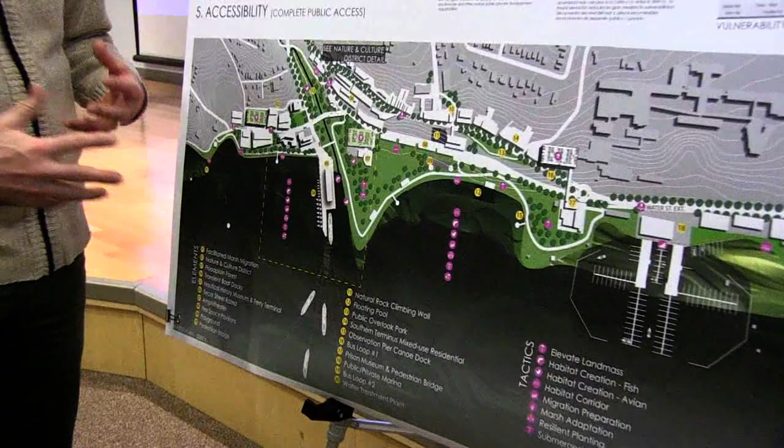So if you start to develop this area into a nature and cultural district, you can bring people here either through ferries or bus lines, and give those people an outlet to rent canoes, rent kayaks, and hang out.

That would be good. Yeah.

And it looks like you developed all along the kill as well—not developed, but you have plantings built up along the side. No, the kill isn't so much built up. The kill is meant to be flooded now.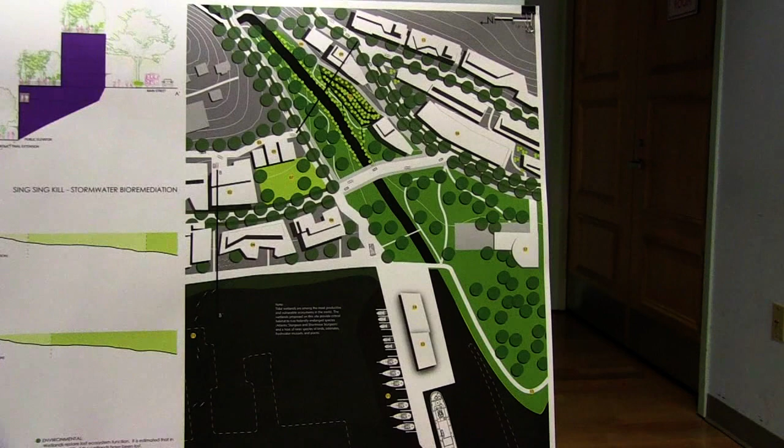And so this area into here, I'm suggesting a kind of robust bridge structure to get across, but that area becomes more of a floodable landscape that's again available to the public.

But where the old DPW site is, right here, I'm building in some mixed income residential here and here. In particular up here, the cool thing is this idea of having an elevator where you can go down, walk in the downtown street, hop through the elevator, and make it down to the Sing Sing Kill area, which this trail connects up to the Aqueduct Trail and also connects down to Water Street.

This is a public amenity area that I'm suggesting also builds in some bioswale tiers to take stormwater from the downtown area, remediate that water through a series of tiered bioswales, and cleanse the water before it gets to the Sing Sing Kill. So that water is clean and available for birds, critters and fish to thrive, which circles back to the eco recreation as well.

So if you have a thriving ecological scene, people will want to be there. And animals will want to be there too.

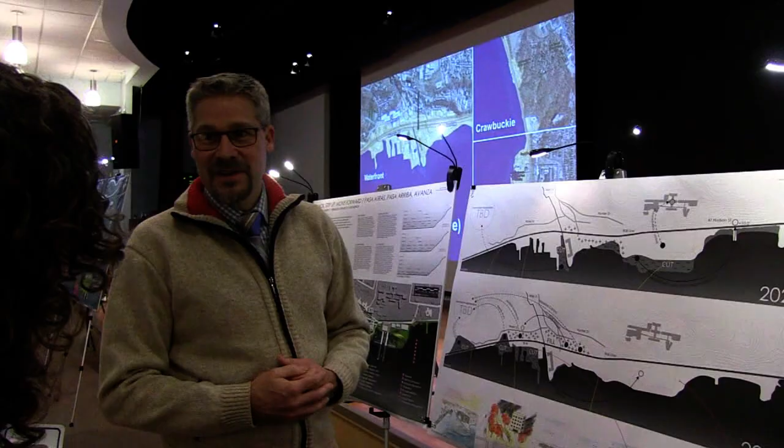And the train—it's gone, I don't have the train, see it's gone. In the 2080s it's gone. Right, it comes offline in the 2080s. And I'm suggesting that maybe 9A is a thoroughfare that could be leveraged.

But also, the average winter temperature in Ossining in the 2080s is going to be 39 degrees, which means less ice, and perhaps the ferry system could be augmented in a major way—more of a line of transportation north-south to New York City and back.

But yeah, the train's a big issue. It's interesting because I think the train was prominently featured in the last rendition, and now it's sort of like, yeah, it's gone.

It's a little scary. I'm keeping it in the 2050s—I'm essentially saying it needs to be built up 3 feet in the 2050s. It's still feasible, but in the 2080s, my assumption without them at the table is that it's going to be financially not feasible.

All right. Well, thank you.

It's again, I think it's really interesting, taking into account what we already have, showing the phased rebuilding of really a wonderful destination, Ossining for ecotourism, I would say, and then taking advantage of that ecotourism to bring people in and have them get back up to our downtown, which is going to be fun.

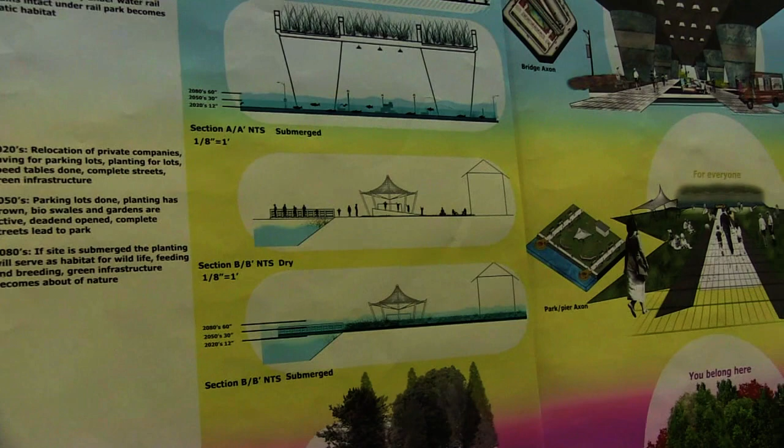I think one of the things that's really valuable and interesting about your proposal is focusing on how elevating the train doesn't just solve for the tracks being underwater, but your vision for how being under the tracks is a nice place to be, a positive space for people to gather. It naturally lends itself to being an organic gathering space, whether there are food trucks, benches, or shade on a sunny summer day. I lived in Queens for years, and there are some really awful elevated tracks you do not want to be under in the city, so I think that's a bit of an adjustment for people to envision the multiple benefits for accessibility for vehicles and pedestrians to cross under the tracks, as opposed to just having two bridges, one much further north.

But also, the space underneath is actually an inviting space. Train station parking would happen throughout the space, and then there's an off-site parking garage a little further north.

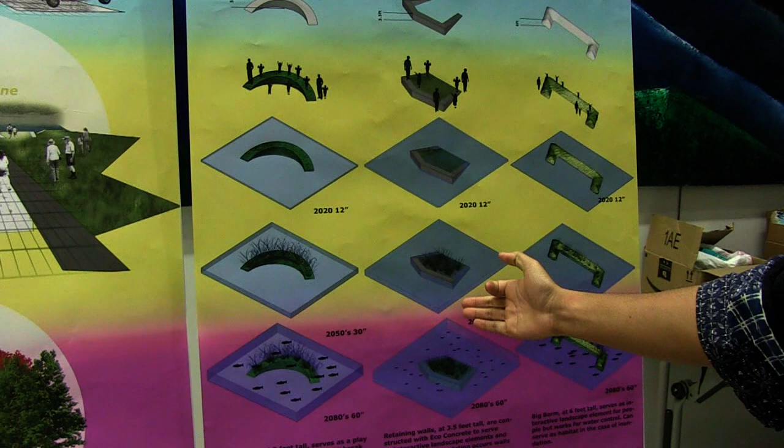These different elements within the park include playscapes, retaining walls that can be infilled with grass and soil, and the big berm. These are meant for human activity and playing on, but can also serve ecological value over time, helping as a breakwater when flooding rises and slowing down water. Over time, it can be an ecological benefit for organisms when people aren't there anymore. Fish can be here for breeding, eating, or just living.

So is your vision that we'll create this, the train tracks elevated 30 feet here, so there can be roadways for pedestrians and cars, with accessibility for what you're referring to as a floodable park? So does there come a point where the park is just always underwater? In 2080, yes, it's looking that way. If things are about five feet underwater, we're not going to be there anymore, so it just doubles as habitat.

And is this the material you're looking at for the retaining walls and the steps? Where am I seeing that in the design? You can see them here, I have them kind of listed as retaining walls. These highlighted things are retaining walls throughout. The big berm is here, and then these little playscapes are in the more naturalized forest areas.

Okay, now did you address what's going to happen to, is this building, Harbor Square, staying? Harbor Square staying is good, I think it's still a good generator of money for the city. Also, it's just built, we can't just pick up a building and throw it somewhere else.

Well, some of the designs have it going away. I know, but it's about being contextual, and realistically, you just can't demolish a brand new building.

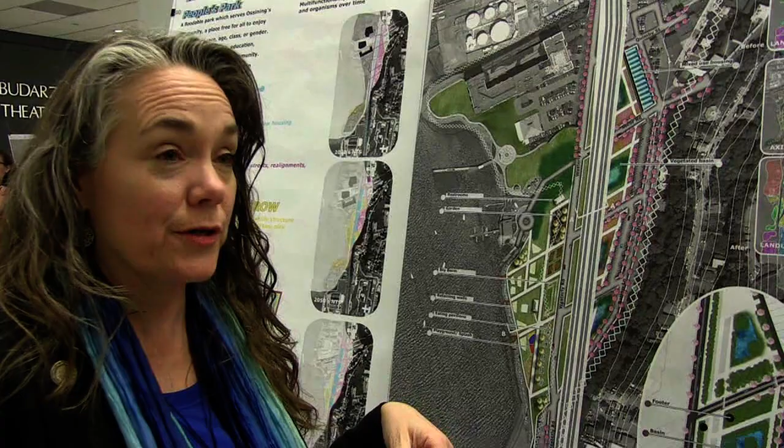Some of the other big things on the waterfront that would have to have some engineering to be able to be preserved are the Sing Sing Prison Museum, and right next to that is the county's wastewater treatment facility. From what I've gained talking to representatives from both, it seemed like the prison museum is technically out of the floodplain, and the wastewater treatment plant already has a plan of building a levee wall around itself to protect it. They're not moving, and they won't take anything from me. So I said, okay, I'll just work around you and build some dense planting in case of an overflow, with overflow incident spaces that can help naturalize and purify the waste. Let's hope it doesn't come to that, but I can't really touch anything they don't want to move.

The reality is it's a gravity-fed system, so it can't move. There's going to either be major engineering to move it or major engineering to preserve it in its location. So I can just vegetate around it and make it a greener space to help absorb any discharge.

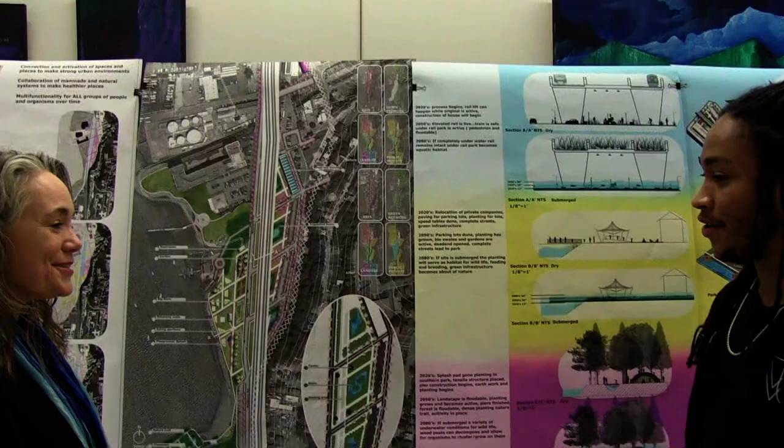Thanks so much, you guys really spent a lot of time getting to know our community and thinking deeply about who we are and what we can make in the future. Thank you, Juan, really appreciate your time here. Thank you. Thanks.

The second line is about track protection. I propose to raise the railway about 6 feet - you can see a section of the railway. I raised it like a small levee in the middle of the site, combined with several green spaces and terrace spaces which connect it to the parks in the first part. In the Sing Sing Kill area, I put a small floodgate which people can cross under in normal times, and when the severe storm comes, the floodgate can serve its function as well.

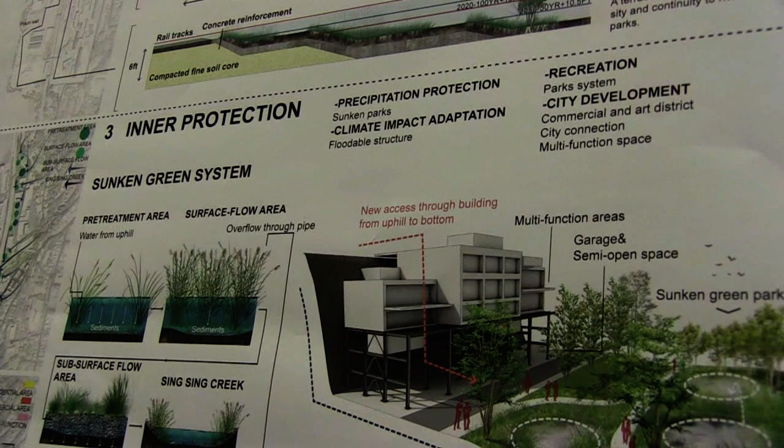The third part is about inner protection. I created a linear sunken space to absorb the water from the city, because this site is down the hill, and when the rainfall comes, water from the city will rush into this side and the site will be flooded from the inside. So I created this space so the water can cross through a wetland process to slow the water flow and also purify the water, which will finally go into the Sing Sing Creek and into the river.

This site is mainly about city development. I think in some places land use might be changing in the future. This is mainly about two groups which are warehouses right now, I believe, and might be changed into residential, retail, dining, parking space, storage combination - like a multifunction group.

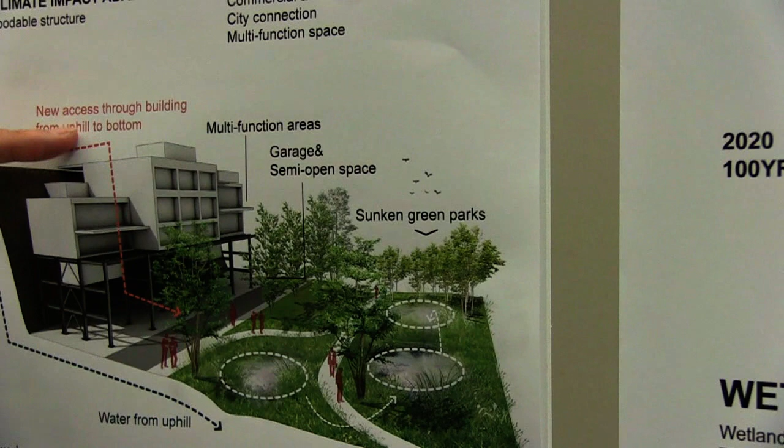You can see the scenario - people can cross from uphill into this building and down to the building and into this waterfront level, to make more accessibility. Also on the first and second floor, it's made more floodable, like a semi-open space and garage, which is okay to be flooded sometimes.

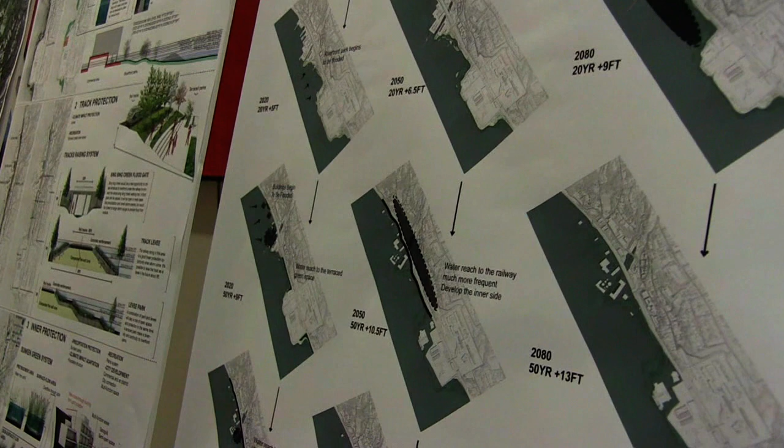I wrote the key changes on top of it. From 2020 to 2050, the priority is to change the water edge, to change the edge type to prevent flood from outside immediately. After 2050, it's time to raise the railway, because this space is much more frequently impacted by storm surge. After 2080, it's time to change the space inside to coordinate with the space outside, making the waterfront as a whole serve a function for this city.

The fourth part is mainly about the rendering. You can see the track levee behind it, the green space around the street, and also the Ossining trolley I want to introduce again.

People can take public transportation to this site, not only their own cars. And the second rendering is about Sing Sing Creek.

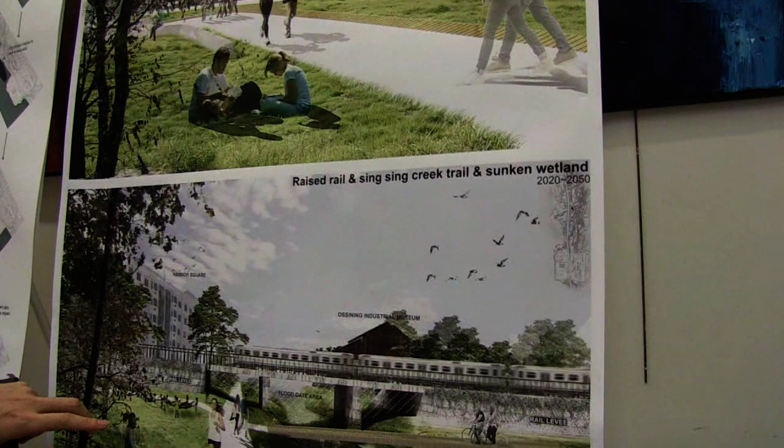The Sing Sing Creek goes under the railway, and people can also cross under it. The creek serves the function of a wetland to absorb water. And you can see the flooding gate area that serves a function when the storm comes. Yeah, that's about my project.

Starting from the end here, I really like the way you have this, because right now this is like a canal. You've opened this up because that will do a better job at absorbing the water and minimizing the flooding in that area, right?

Why did you, and everybody loves the trolley idea, I think when you first proposed that we were all really excited, because I assume that allows us to have maybe less parking on site for the train as well, to have really easily accessible shared transit. Why did you decide to go with a berm at least until 2050, knowing that by 2080 it's going to have to be elevated?

So you mean for the train tracks? So raise the train track.

I mentioned that this will become more frequently impacted by water level change. You can see the black line is the railway, and it's only 100-year flooding events that will reach the railway. But by 2050, it's much more frequent to reach this site.

So in 2020 it can be handled by basic sandbags or flooding panels to prevent water from crossing the railway. But when it becomes much more frequent, I think raising the railway is a much easier way to prevent the water.

So it's only the berm, the levee will still exist in the future, but you can see clearly by 2080 the 100-year flooding will go above the railway. But most of the storm events will be blocked by the levee.

I really like the terrace parks. I love this look, and it's also beautiful and very functional for people, while the park is still accessible.

And then I assume that it's all designed so that as the water levels rise, the river just takes that back. Yeah.

So the other thing that's unique about creating the berm is it creates a whole new ecosystem on the inland side of the tracks. That's essentially a water feature on the east side of the tracks, right?

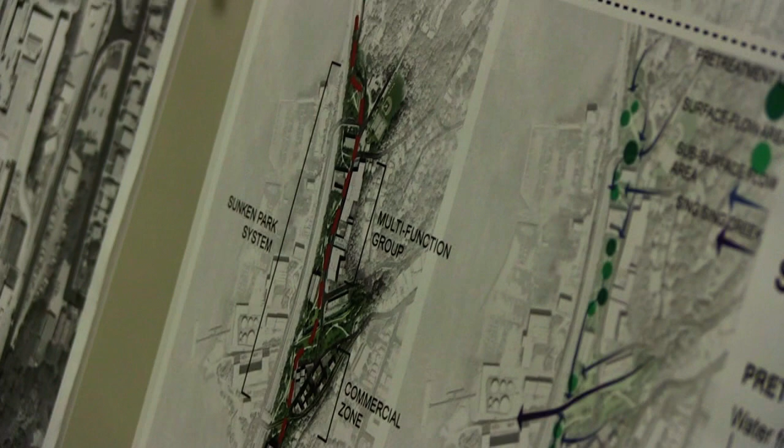Yeah. And is that permanently there, or only when we have flooding? It's permanently there, just like some green space system here, but when severe rainfall precipitation comes, it will hold water on this site. But in normal time it's just like a sunken space or a big water garden.

It would still be inviting for people. It's also for people to participate. It would actually be a positive thing.

And then I think I noticed in some of, and I'm trying to remember where it was, that you have some barriers created to protect some of the key infrastructure that's on the waterfront. Yes, there it is. That's the one I was thinking.

Because here's our sanitary sewer treatment facility, right? And this is the sanitary sewer. Okay, and what do we have here? And here's the Sing Sing Prison Museum back here. Which is this building? This is the building, the QWC building.

Okay, right. But what happens to Harbor Square? Is that this building right here? Yeah, Harbor Square, so it's the wetland in front of the Harbor Square, and the Harbor Square is at some high elevation that will not be affected by water level change.

You feel that it's been designed in a way that it will sustain the water level rise even through 2080? So in 2080, you can see the basic scenario that it wouldn't be flooded.

Okay, great. Venice. Pardon? Be like Venice. Well, let's hope we do a better job than Venice, and make use of our public funds to plan for the future.